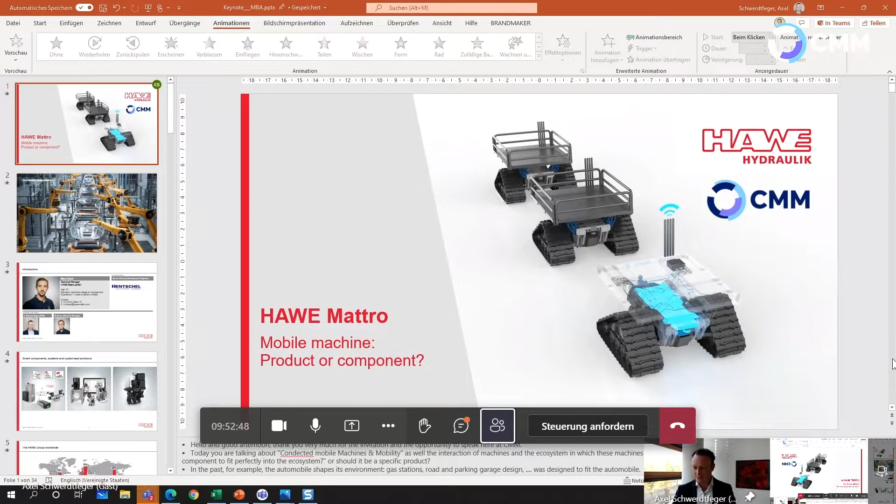Da sind sie schon, oder? Wenn ich das richtig sehe. Hallo, guten Tag zusammen. Sie dürfen loslegen, die virtuelle Bühne gehört Ihnen. Gut, dann schauen wir mal, ob wir auch übertragen können, dass das alles klappt. Eine Sekunde, geben Sie mir bitte. Ich versuche das Zeitmanagement genauso professionell wie der Herr Sauerborn hinzubekommen, begeisternswert hat er das gemacht. Also, wir gehen in die Präsentation und Sie müssten es gleich sehen. Vielleicht, wenn ich einen kurzen Hinweis kriege, dass es geklappt hat.

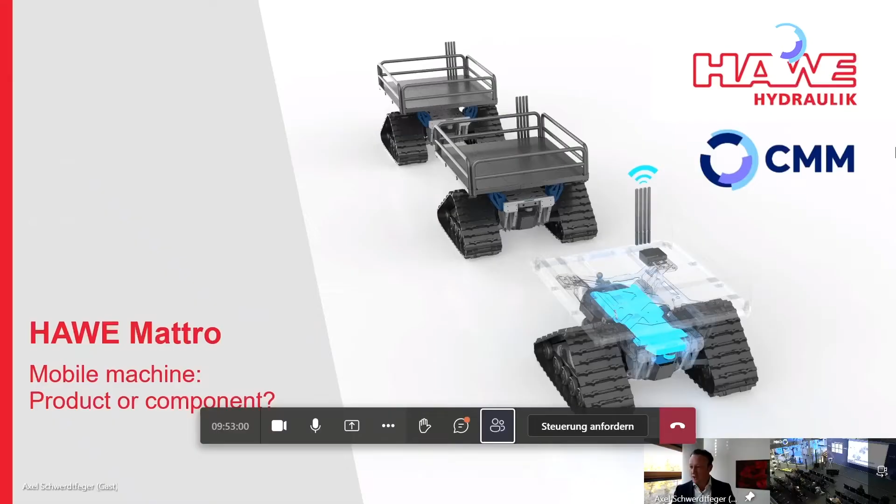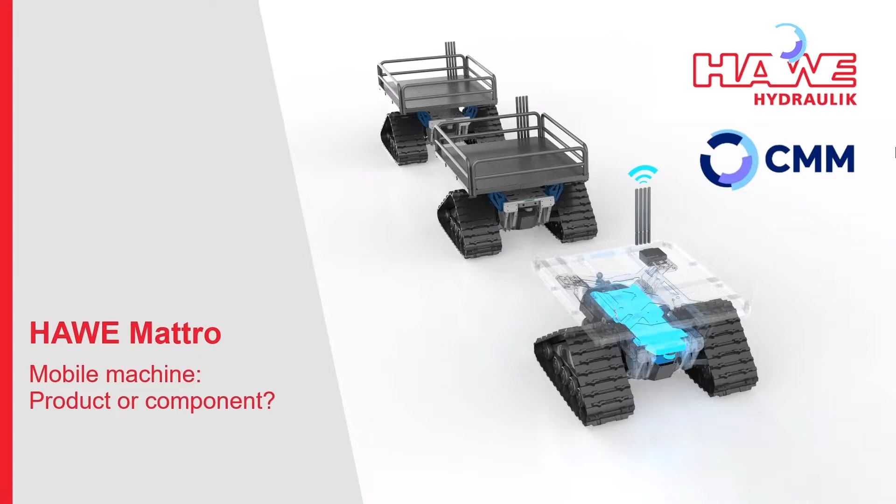Today, you guys are talking about mobile machines and mobility, as well as the interactions of machines and the ecosystem in which these machines move. Today, we want to make a thesis: should a mobile machine be a component to fit perfectly into the ecosystem, or should it be a specific product?

In the past, for example, cars and automobiles created their own environment. Gas stations, roads, and parking garages were all created according to them, fitted perfectly because the car was designed as it was. In the future, we expect that the demand for connectivity might shape and influence the design of vehicles much more, and this will create a different surrounding. The question is, should these components be created as a product or different?

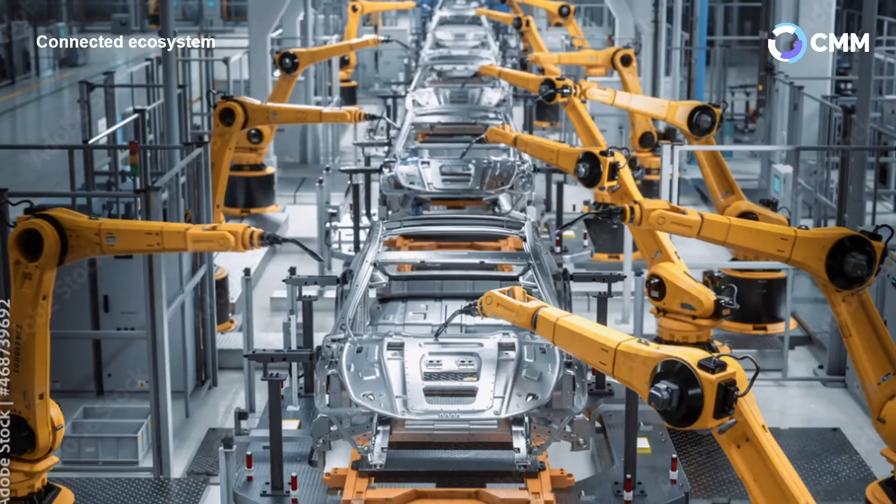How does the picture we show now fit to the topic of today? It's not a mobile machine, even if it is creating mobile machines. It is the perfect example of an autonomous, networked ecosystem in industry, consisting of main control systems, data connections, sensors, and actors, and a whole lot of robots. These robots are just a component with fully defined interfaces of data, mechanics, and sensor. I think future mobile systems will have a similar architecture, with vehicles like cars, tractors, and excavators instead of robots.

These vehicles and machines will be just components used in the network ecosystems. In the following slides, we want to show you what this means for our vehicle design by using exciting examples. And to give you an overview, who are you listening to? Actually, it was planned that Marco Bauer would take the presentation today, but unfortunately he is sick, like a lot of people around Munich at the moment, maybe because of the Oktoberfest.

And that's why we take over. I'm Axel Schwerdtfeger, the CTO of the HAWE Group, in charge of development and product management. And Mr. Benjamin Knaus, he's division manager and the heart of Rovo. I do not want to forget to give special thanks to Dennis Kirchner. He is right with you, and he brought the Rovo to you, and he's the guy close to you to answer questions immediately and show the functions of the system.

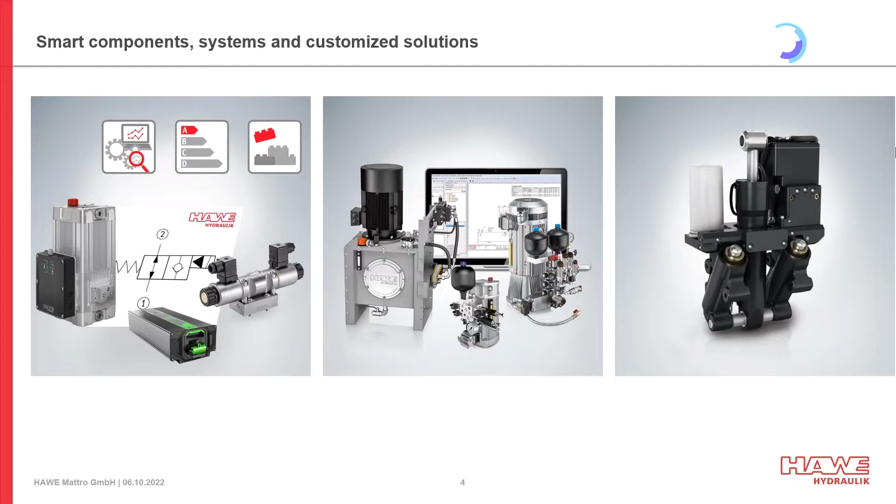HAWE is creating usually HAWE hydraulic products like IoT-ready power packs, batteries, and valves for all kinds of use. With a very special configurator, we give our customers the possibility to use all these components to create complete machines. And if this is not enough, we also offer designs especially for customer requirements, like this PTT, a power trim tilt system to trim and tilt very strong motors on leisure boats. But this is just one example.

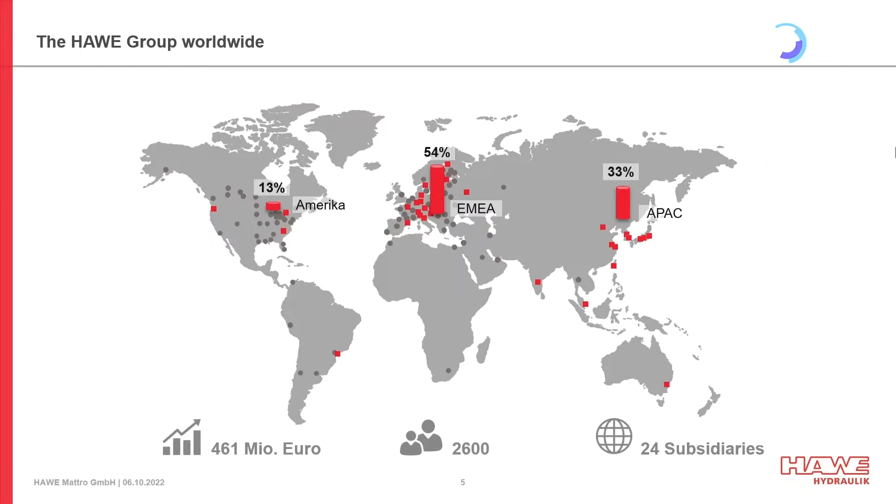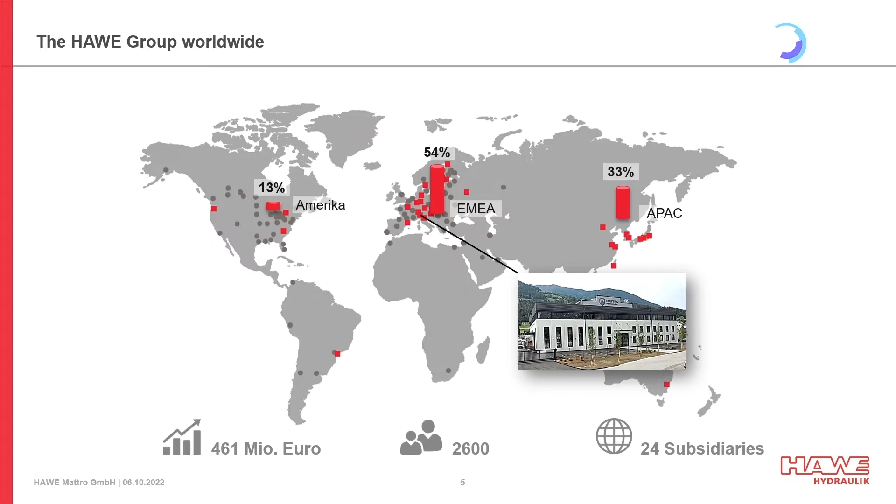We are a company working worldwide. We have 2,600 people, a turnover of 460 millions, and are located all over the world. We have 24 subsidiaries and a lot of partners. And the products we are talking about today are created, designed, and developed in Schwaz in Tyrol, Austria.

The starting spark of the foundation of HAWE Mattro was in 2006. In the early 2006, nobody was talking about electrification at that time. Mr. Alois Bauer was the founder of Mattro, and he wanted to create real solutions to set an alternative to combustion engines, out of an ecological drive and out of the conviction that something has to be done to find solutions for the ecological change. So that's why he founded the company.

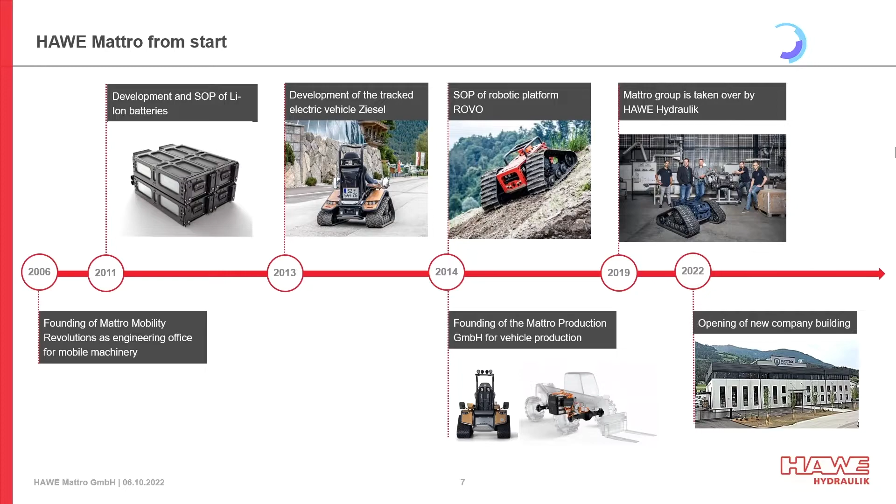And since then, a lot has happened. We designed battery packs which are interchangeable and combinable. We created vehicles with manned operation and without persons on board. We help people to create electrification projects. And since 2019, HAWE Mattro is part of the HAWE Hydraulik group. And we invested a lot. We opened up our new subsidiary in 2022 in Schwaz in Tyrol, where we now have the right surrounding to do our work.

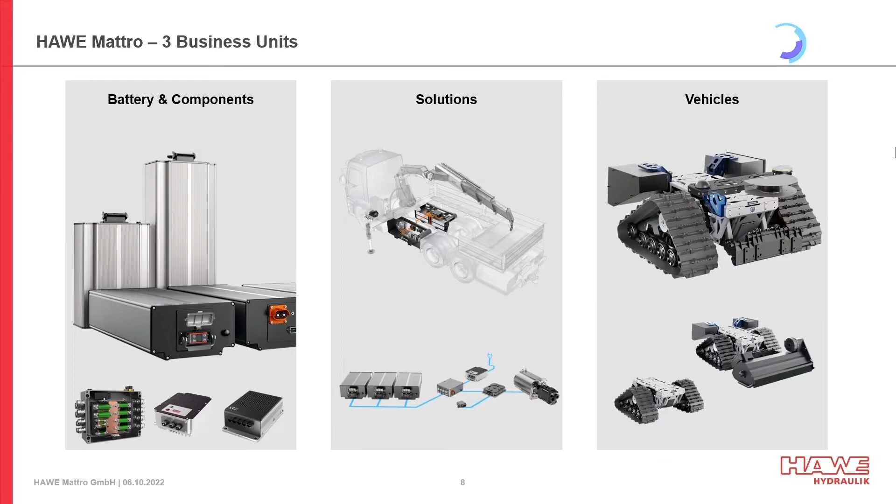Mattro is creating solutions in 3 business units. One is the business unit to create accumulators. One takes part in helping our customers leave the old times, reducing combustion engines and going to electrical drive. And the third one is creating vehicles. And now the question is, should these types of vehicles be complete products, finished and creating their own surrounding, or should they be components?

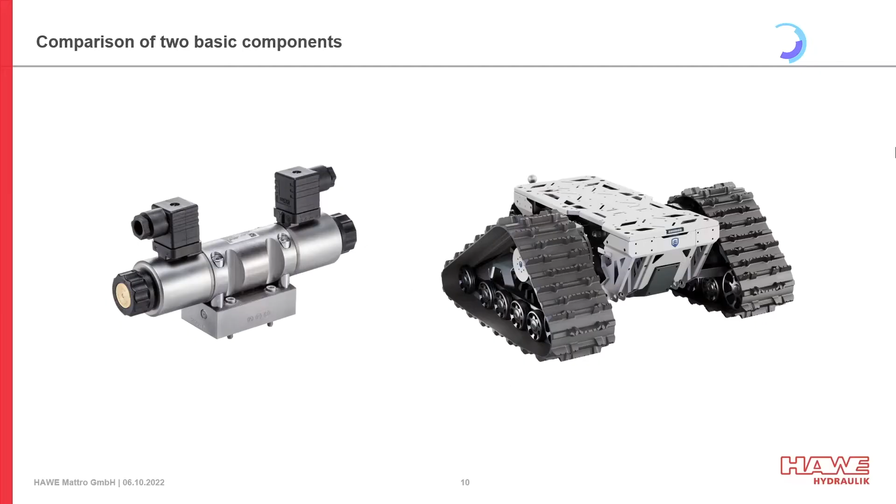To get into this topic, we thought it might be a good idea to do some comparison. Here you see two products. One is a type of our valves, called ROLV valve - it's a seated valve. And the other one is the ROVO itself.

Cheeky but true, both products on the slide are easy to use components with specific interfaces and functions that are to be integrated into something larger. Let's take a look at the components in detail.

There are control interfaces. On the valve side, we have the Deutsch connector directly connected to the magnet, receiving signals. On the ROVO side, so on the vehicle side, we have data connections like bus systems, ROS interfaces, and so on. So pretty much the same.

The functional interface: on the valve side, we have the NG6 flange pattern, a very common flange pattern for valves in the industry. And on the ROVO side, there are a variety of options to mount different solutions, a power supply, and so on. So those can be compared.

Then on the function side, we have the possibility on the valve to regulate flow. This is the function of the valve, making sure that the oil is flowing in the right direction, back and forth. On the vehicle side it's even more easy - actually, the only function is driving.

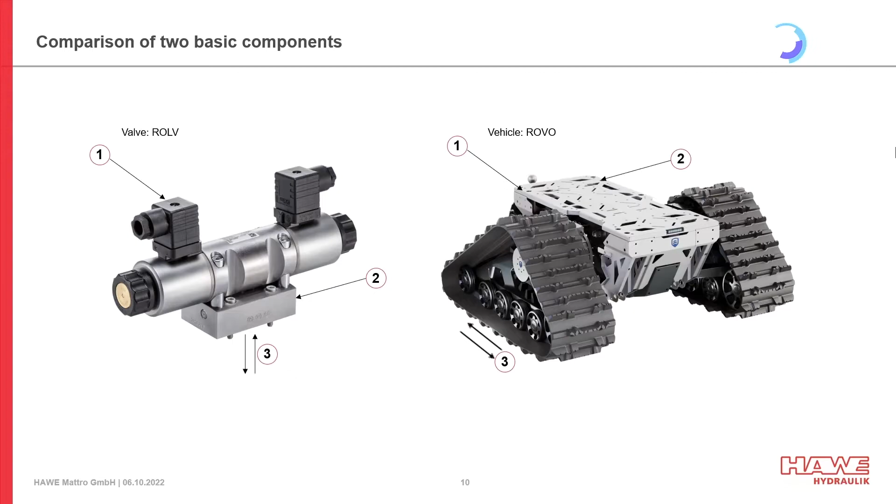To be a right component, there should also be the possibility to add accessories - for example, additional check valves on the valve side, or a hydraulic lifting or power packs on the vehicle side. So on a very simplified level, both solutions can be considered as a component.

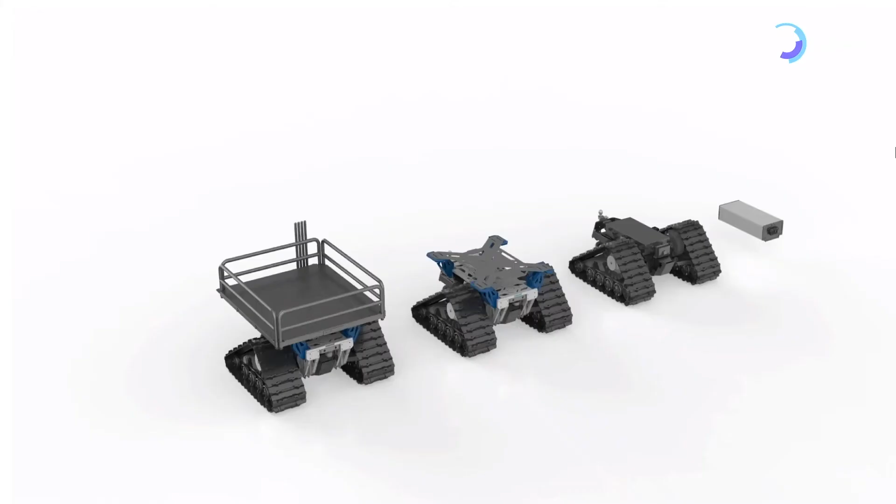From our point of view, this is the right approach to give customers maximum freedom and integrate this component into a networked ecosystem. And to give you an overview how that works, we brought a small video, and Mr. Knaus gives you the sound to it.

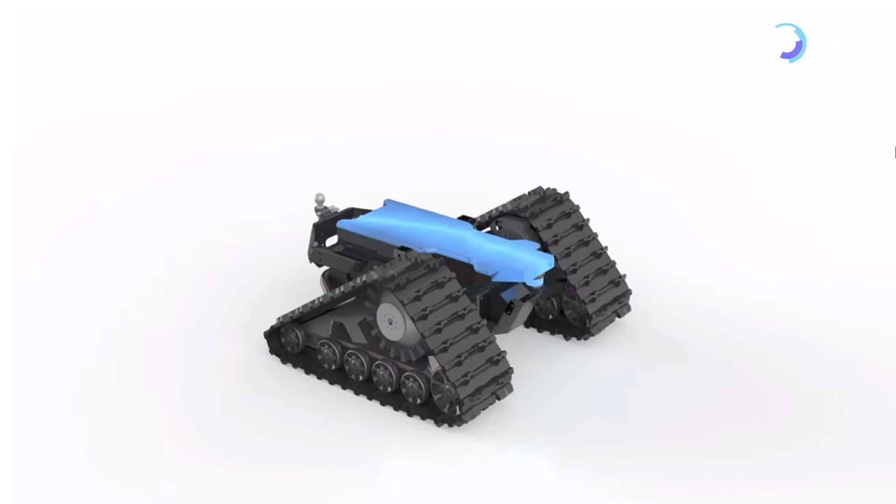The easy swappable battery is the heart of our ROVO. It powers the motor and all the other components. As already mentioned, the ROVO is seen as just a component - it needs to be combined with other components to form a finished application.

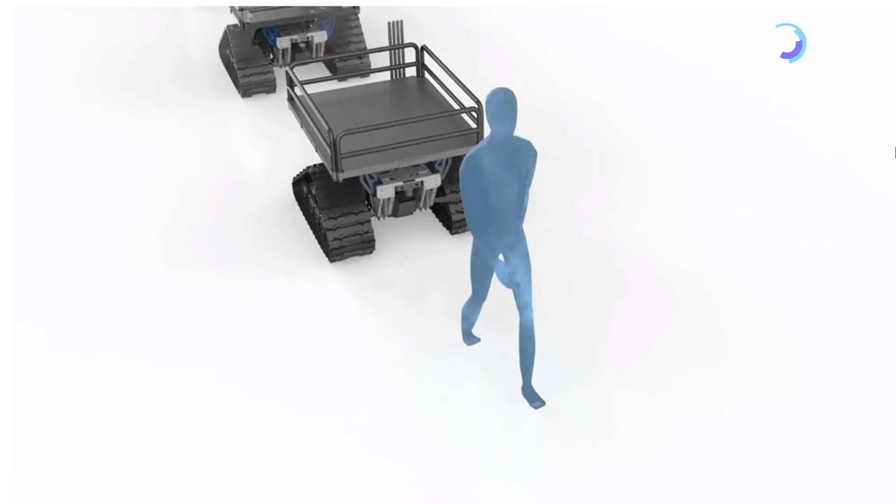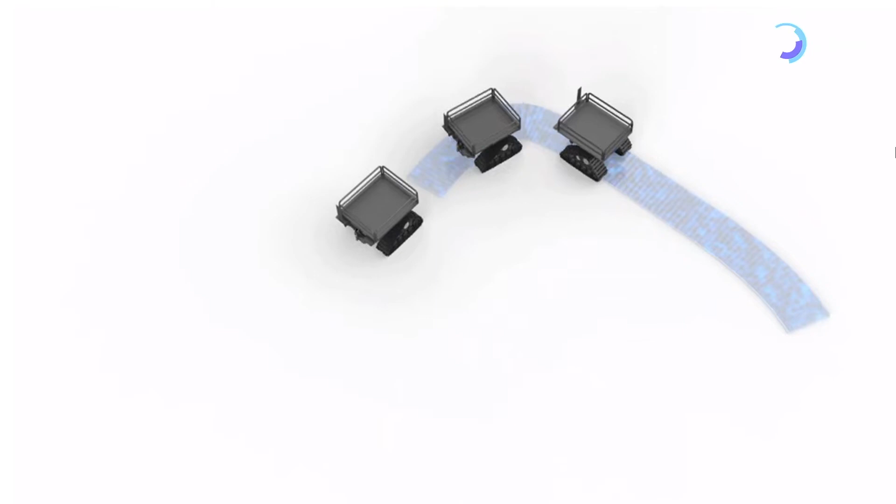Adding additional hardware opens a wide field of autonomous applications. For instance, you can see here GPS waypoint navigation. This can be used for simple tasks like transportation, but also for more complex tasks, as we see in the following scenes.

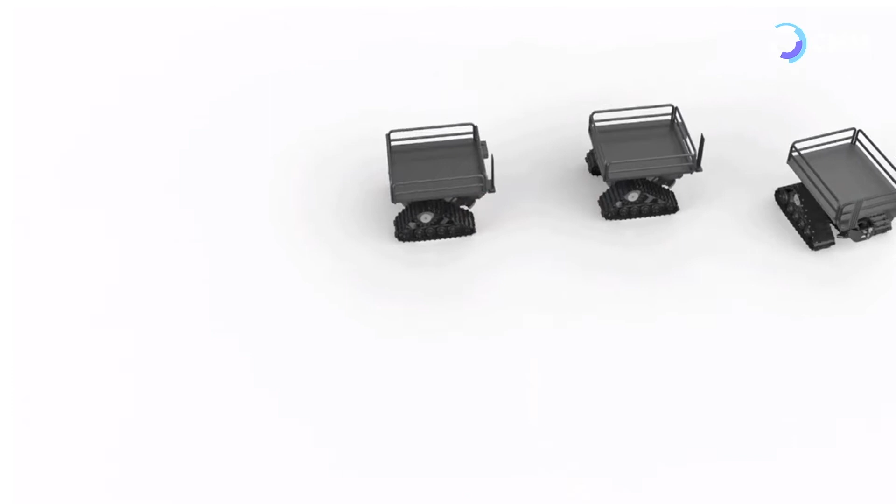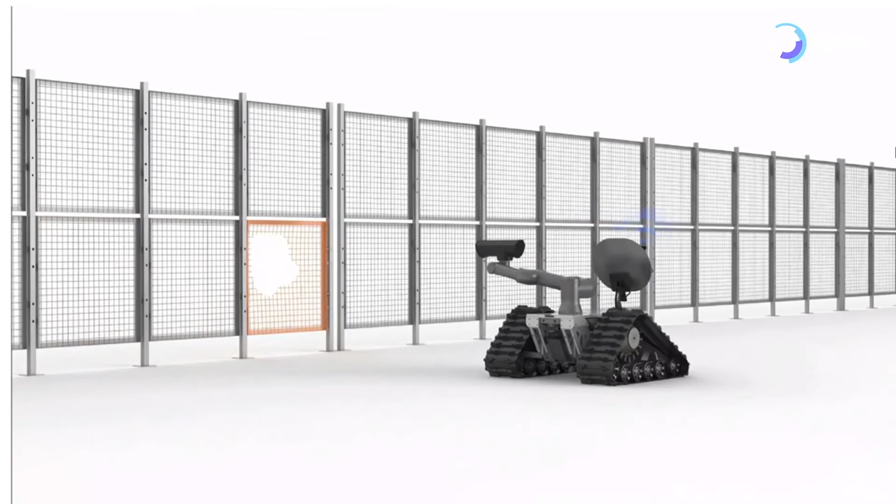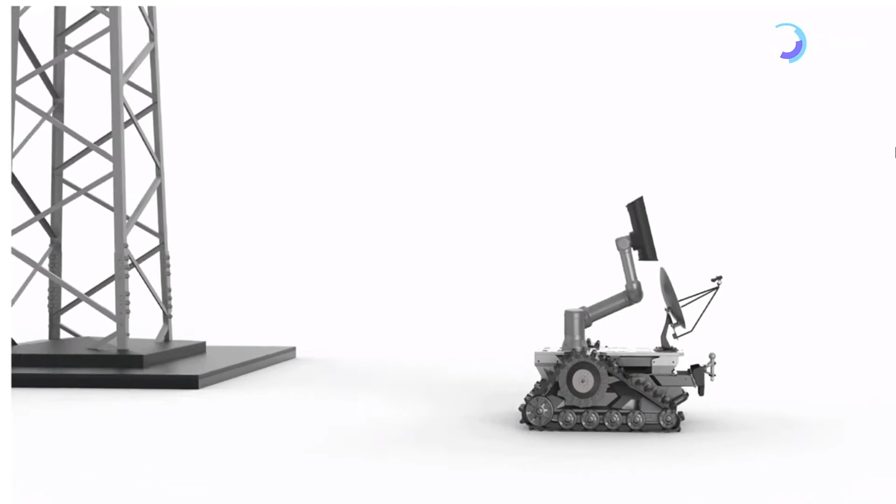For instance, there are many possibilities in the inspection of infrastructure. The robo itself is highly capable of driving in off-road terrain and therefore can be used to inspect various infrastructure.

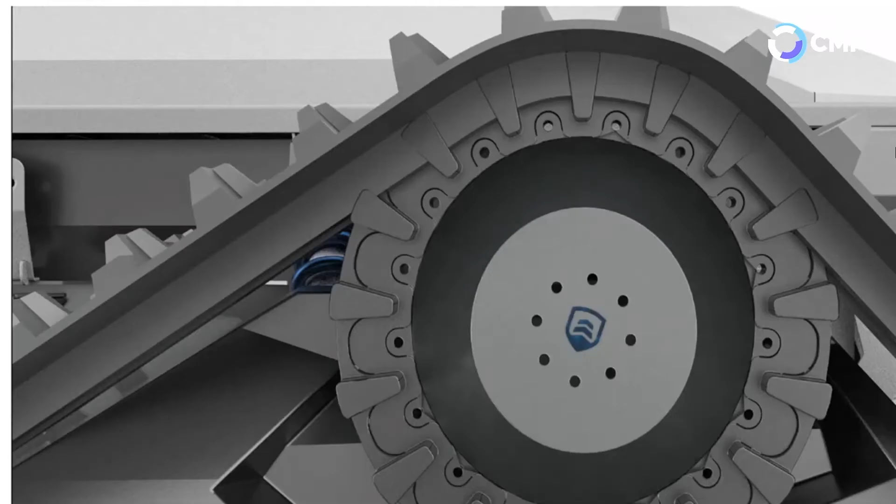Speaking of infrastructure, the robo itself can be used to create infrastructure, as it is a movable power supply - for instance, after natural disasters or in exploration.

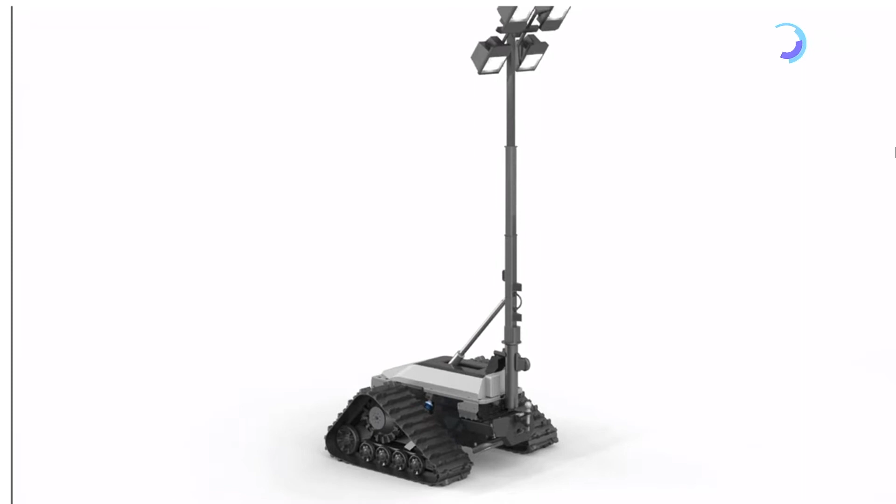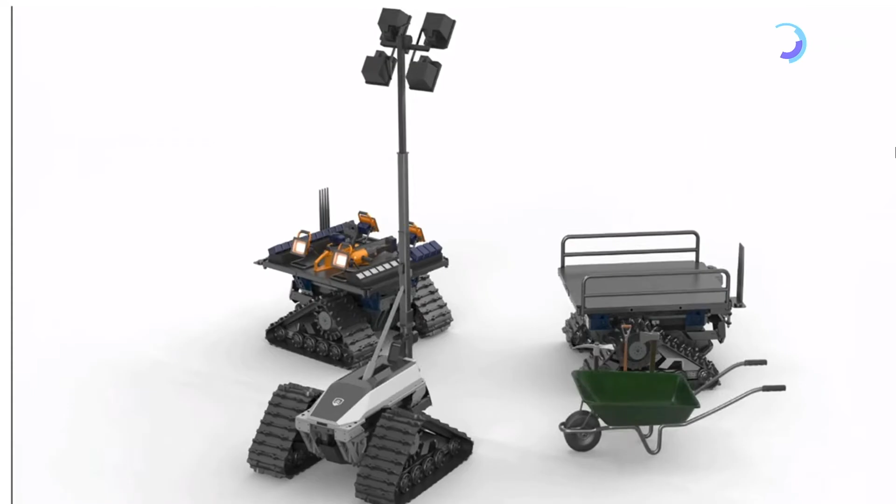As I already mentioned, it can be seen as a mobile power supply, powering different tools or giving light, or building up a communication network, for instance, but also doing simple transportation tasks.

We believe that we need to build vehicles and vehicle parts so that they can be used as a component in different applications. They must adapt to the area of use and not try to shape the area of use due to their design. Why? Let's look at the construction site of the future.

We believe in the future, every machine on the construction site - pretty much what we heard of the speakers in front of us - on the construction site must be part of a data ecosystem. Connectivity will determine how efficiently the machine can be used, how easily it transfers data to connected systems, and how it is using the received data to fulfill their duty the best way.

The machine has to be one part of the ecosystem to give the chance to use all data in a perfect way and boost the productivity of a construction site.

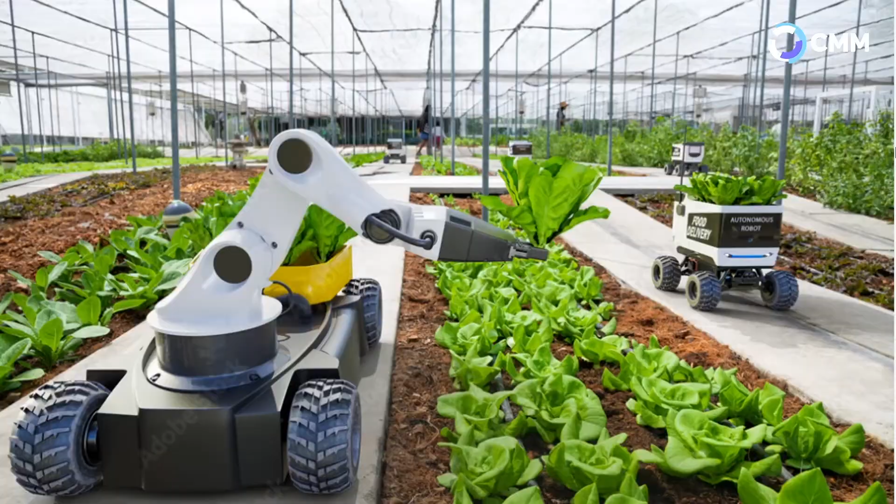Let's look into another area - for example, agriculture. Here, mobile machines will interact in a swarm. Small individual deployable helper robots will take over a wide range of tasks alongside, with, and instead of humans. The machine must be perfectly adaptable to individual requirements.

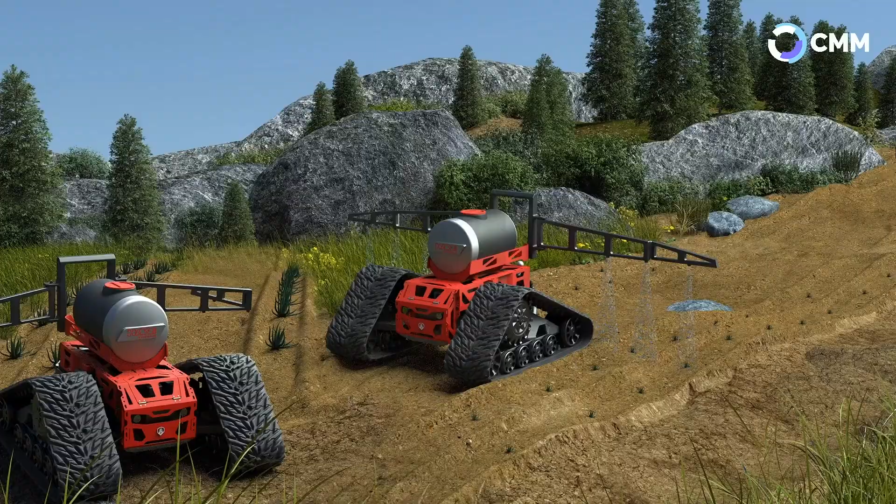In this application, you can see small flexible robots, which in comparison to large tractors, barely exert any ground pressure. They operate in a swarm and make it possible, for example, to apply seeds very precisely. Here too, it is important that the platform adapts, enables connectivity and solves tasks.

So the product itself is not changing the infrastructure, but the infrastructure has to have the chance to adapt, or the vehicle has to adapt to the infrastructure.

My last example shows that the ROVO is designed in the Alps. Mattro is homed in Tyrol in the Alps. Ski slopes, for example, are prepared today with a whole fleet of snowcats. But also in the tourism industry, there are less and less qualified workers, and therefore ways have to be found to prepare the slopes with few people.

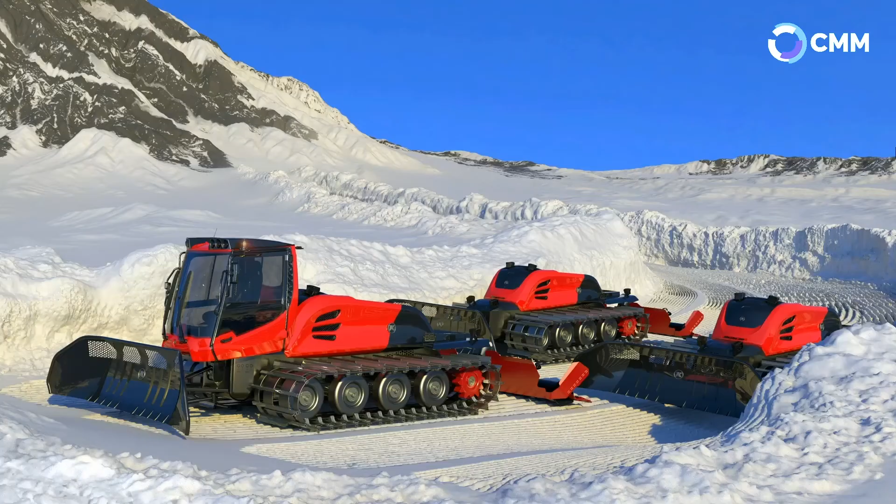In our example, it is done purely electric, emission-free and quiet.

A highly flexible, networked, and in this case particularly autonomous platform can also offer a solution for this. In this setup, one worker can run a whole fleet of unmanned snowcats to prepare the slope for the next day.

By talking about these possibilities and the need to create highly adaptable platforms, we now get into more technical details, as we have some interesting technical examples which might interest the engineers and technicians here. So Benjamin Knaus is taking over. Thank you very much for the introduction.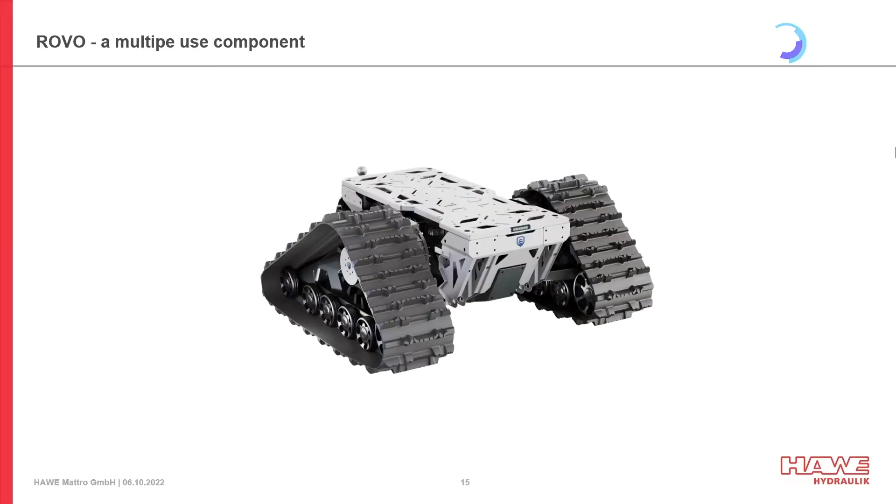First, I'd like to take a closer look at the Rovo as a component. A component is usually part of a bigger system and is connected through an interface to other components. Our idea for the Rovo was a system that can ensure precise driving for customer applications.

We wanted the Rovo to be adaptable and multifunctional, as we assume that the vehicle is not the leading system, but the infrastructure is. We decided to focus on that topic and not spread our know-how too thin among other fields, but created an environment tailored to the needs of our customers and partners.

This means our component first has to fit the mechanical needs of the customer. The Rovo shouldn't just deliver as many attachment points as possible—it has to be able to shape itself to the application. The basic version of the Rovo starts with the most basic components.

The chassis is the most important mechanical part. It houses the battery and is the mounting platform for the track system and the electronic box. On top of these components, various mounting adapters and frames can be placed. Options like hydraulic hardware are also available to deliver a wide range of possibilities.

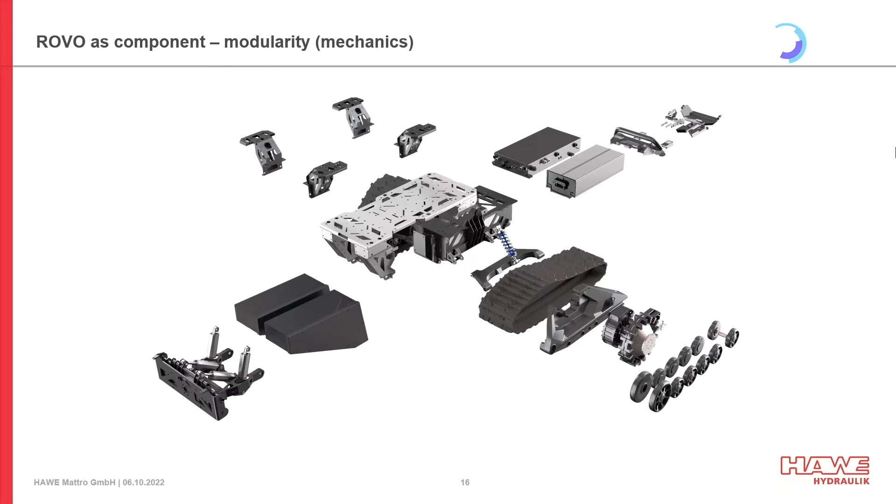When we talk about electronics, we first think of our lithium-ion battery system—but that itself would be worth a keynote of its own. I'll just mention that our battery swap system leaves the choice on range and working time to the customer. For autonomous applications, we also have further options, like inductive charging solutions.

When you design a finished product for a single purpose, it's relatively easy to choose components like motors and controllers. But from the component point of view, you have to ensure enough flexibility to fit as many applications as possible, and make sure you don't lose track and make too many compromises.

For the Rovo, we found a motor, motor controller, and gearbox bundle that provides various possibilities for different applications. At the moment, we have two main variants—one for high speed and one for heavy loads.

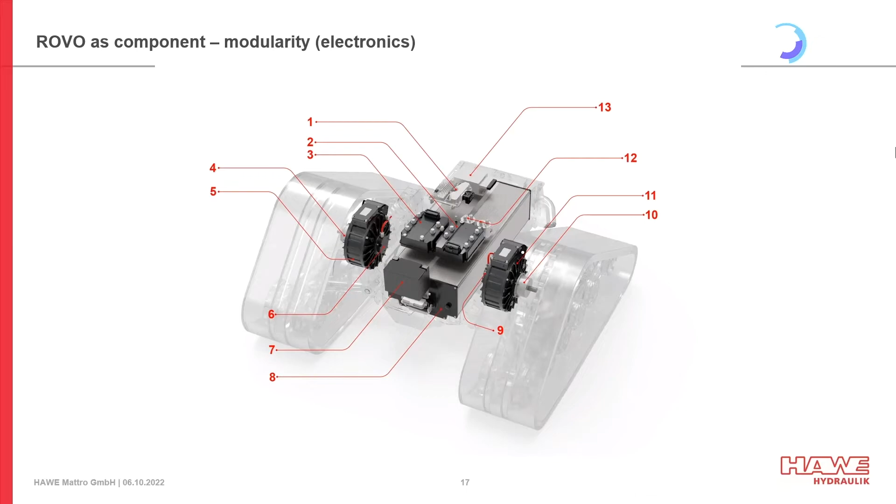As the Rovo really is a power supply on tracks, we ran into the question of how to supply external power for the customer's applications. In the past, we did this by customization for every single application. The learning was hard, but for the new generation we improved and implemented standardized power interfaces.

Choosing the right interfaces isn't the only challenge. It may sound self-evident to place an interface like a plug somewhere easily accessible for the customer, but with the extreme range of possible Rovo applications, it's not that easy. The solution was to reduce the number of interfaces to an absolute minimum, and give every interface more than one use if possible.

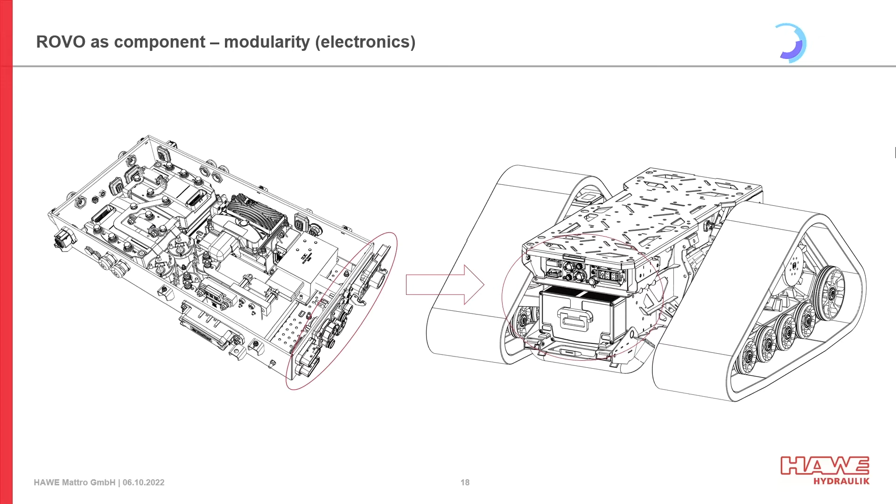For instance, a signal plug is also exchangeable with a low power plug. And the charge plug isn't only used for charging the platform, but also to supply external attachments with high power.

Speaking of modularity, we also have to look at software and related topics. We learned that it's not enough to just tailor the software to the needs of every single application. We started standardizing by applying two different layers of communication—one for internal vehicle communication, and one for external communication between customer and vehicle.

To ensure the robot can be operated safely and precisely in every use case, we also created a clear software interface. The customer can externally control the robot via CAN bus with a defined protocol. Steering the robot is as simple as sending direction of rotation and rotations per minute to it. This opens a wide field of possible applications, especially under the topic of autonomy.

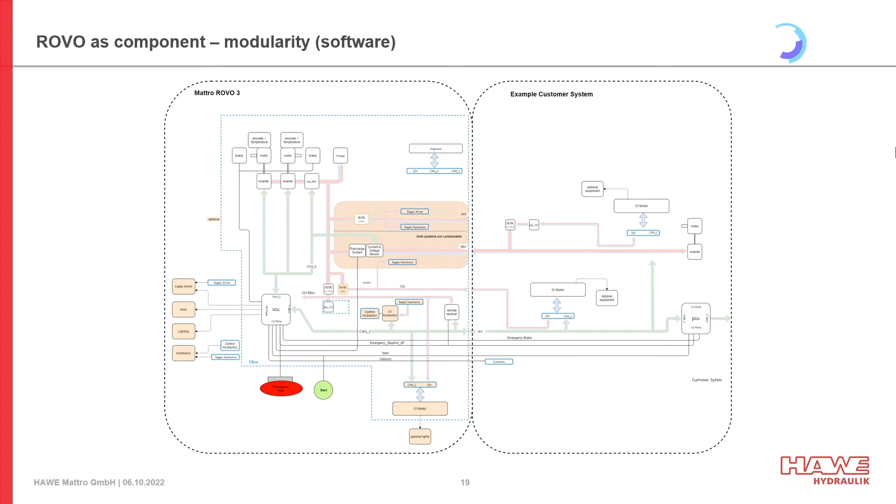Autonomy or autonomous applications are huge words. We all know that there is more to it than just finding the right components. But finding these components is a basic requirement, and the robot proves to be just that. To keep it short, I just want to give you a rough overview of what's already possible with the robot.

Implementing additional sensors and intelligence leads to functions like gesture control, follow me mode, GPS waypoint navigation, teleoperation, and semi and fully autonomous applications. You could ask why we as HAWE Mattro are relying on partners for autonomous applications instead of doing it ourselves. As we see the robot as a component, in our opinion, autonomy is a component as well. But let's have a look at some projects.

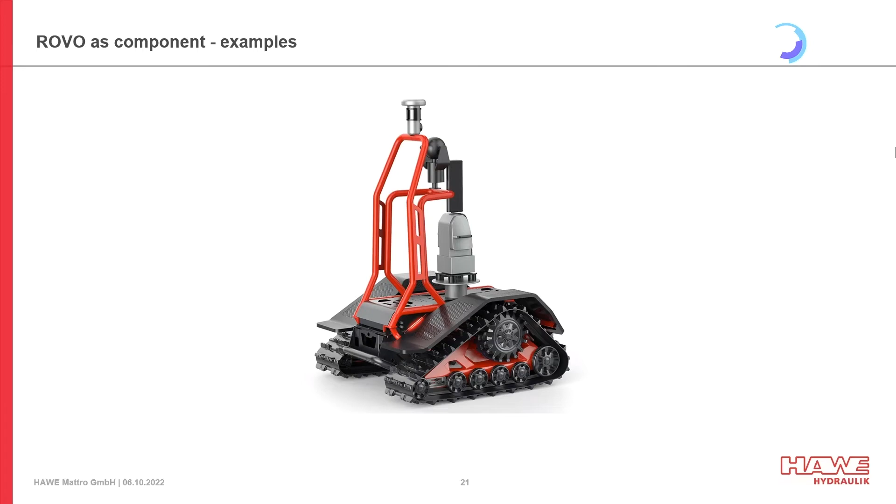One of the most challenging applications we've faced yet was mapping in underground mining sites. The degree of autonomy is directly related to safety and reduced human presence. It's not enough to put a good LiDAR on top to be able to map the mining site. As you can imagine, there is no GPS signal available for localization. The vehicle must be able to locate itself, recognize obstacles, and potential hazardous situations. Due to teleoperation, of course, it is possible for a human being to step in if necessary.

Because such mining sites can be real huge, a solution to increase the range of the robot is needed as well. Inductive charging comes in handy at this point, because it's one of the easiest ways concerning automation without human interference.

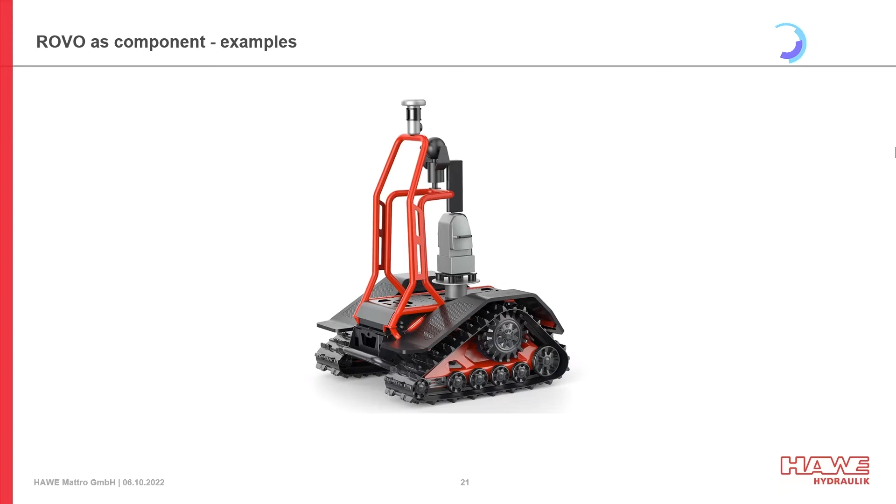The Alpha Wolf, as an example, is a multifunctional robot for firefighting purposes. It is used for search and rescue, reconnaissance, safeguarding, and of course for firefighting. To be able to do so, it is equipped with a great amount of hardware and connected to a mobile mission control center. In this mission control center, every single piece of information is collected and processed to the needed task. The challenge on this project was to integrate the robot in a mobile and flexible infrastructure.

It not only provides information about location and speed to itself, but for example has also integrated sensors for temperature and gas detection. And not to forget about the water hose it has to carry through the wilderness to be able to fight the fire in the end.

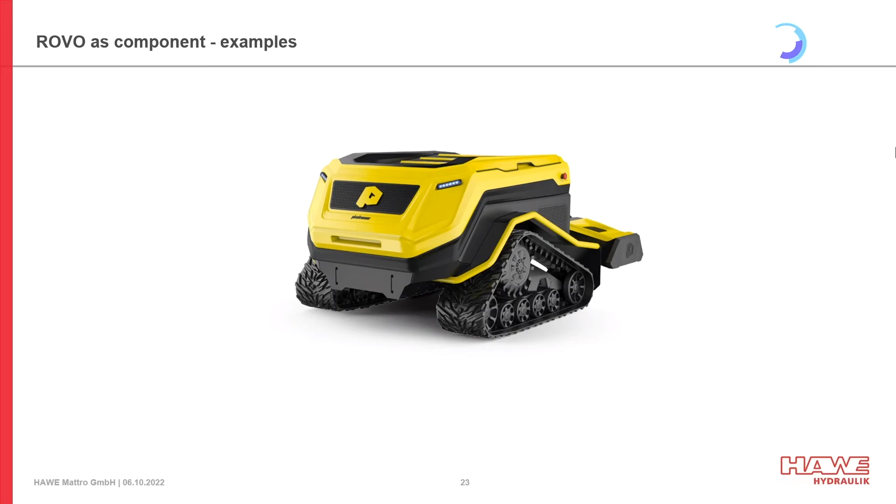The Pixel Runner is a quite interesting piece of hardware. Its purpose is to print huge-scale marketing messages on grounds like grass, asphalt, and snow, for example in sports stadiums or on Formula 1 racetracks. This comes with various challenges in localization and precise steering, especially if you think about a 3 by 3 centimeters small pixel, 3 colors, and more than 100-meter long logos. These requirements were met by a heavy-duty motor gearbox unit and tailor-made motor controller parameters.

To come to an end, a component does not only have to be modular and flexible. It is also very important to keep it as simple and accessible as possible. The goal is not only to make it possible, but also to keep a project fast and at low cost. Only then are we able to face future challenges, like more and more automation and autonomy.